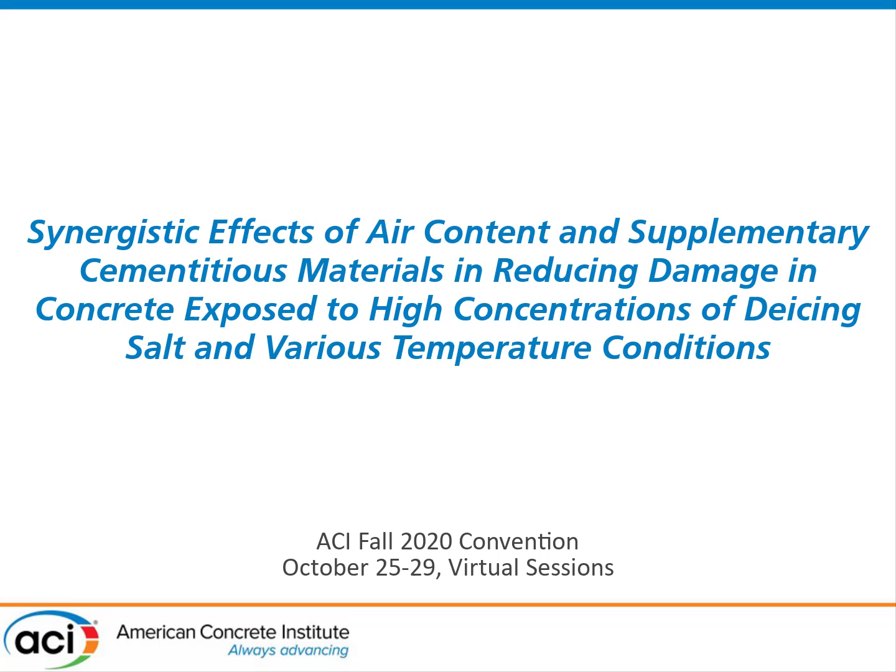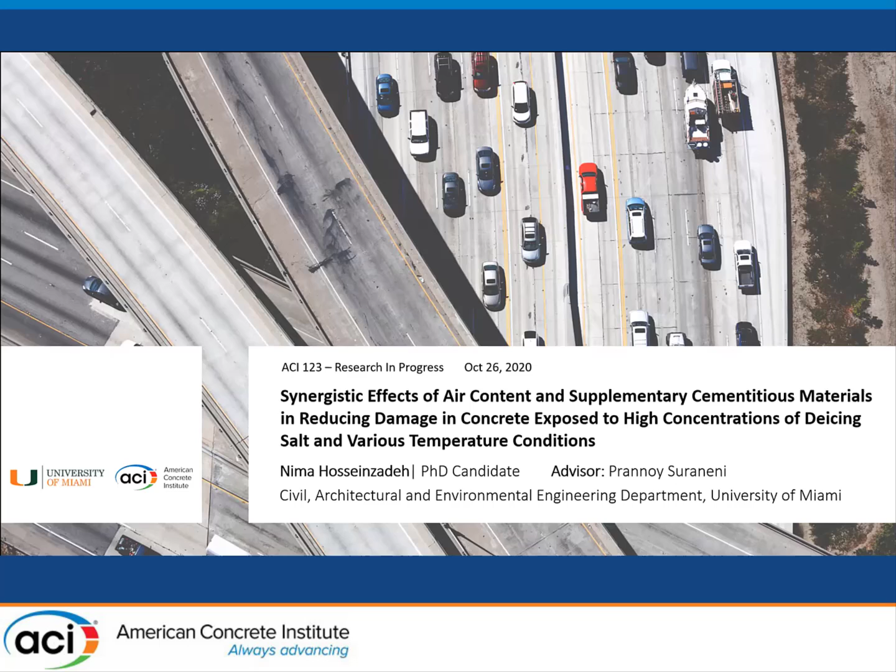My name is Nima Hosseinzadeh, a PhD candidate from Civil, Architectural and Environmental Engineering Department here at University of Miami. I'm working with my advisor, Dr. Prannoy Suraneni. Today I'm honored to present one of the chapters of my PhD thesis, which is on synergistic effects of air content and supplementary cementitious materials in reducing the damage in concrete exposed to high concentrations of de-icing salt and various temperature conditions.

We are going to start with the motivation that triggered us to start working on this project, then move to our objectives and methodology. We're going to get to some results while the research is still ongoing, get some interim conclusions, and then mention the next steps regarding this project.

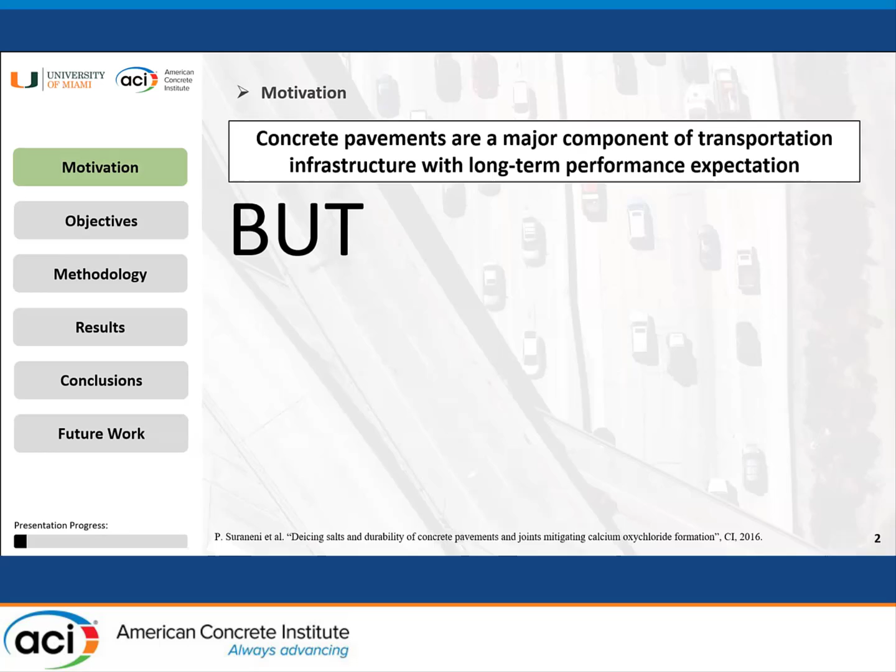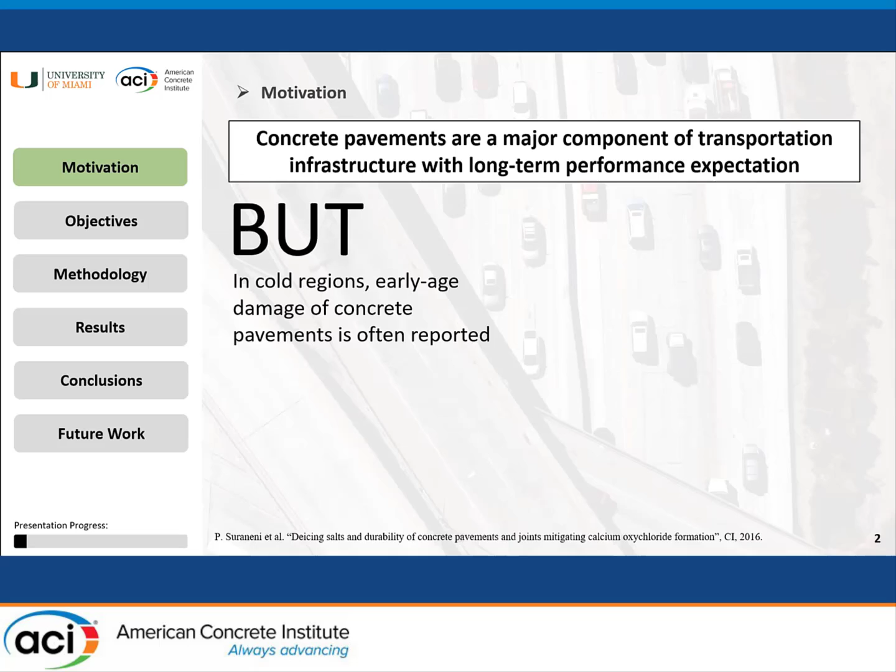Concrete pavements are a major component of our transportation infrastructure, usually designed and expected to have a long-term performance, like 50 years or so. But in cold regions of the United States, cities like New York or Chicago, early age damage of concrete pavements have often been reported. This usually happens within the first 10 or 15 years of the lifespan of the structure, even though they are designed to last for a longer period of time, like 50 years. So what is causing this damage in our concrete pavements?

First, they attribute this damage to the freeze-thaw cycle. As most of us know, we have daily temperature variations. Over the nighttime, the temperature drops below the freezing temperature of water, and over the daytime it increases. This happens over time, and we have water in our concrete. When the water in the concrete freezes, it expands, and this expansion causes internal pressure from the inside of our concrete matrix, which can lead to cracks and deterioration of the concrete structure.

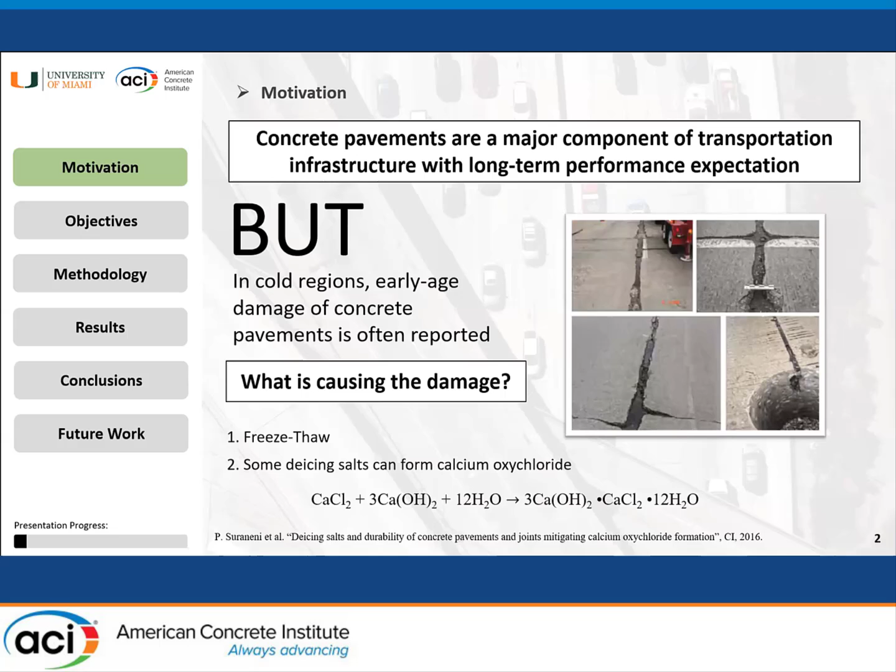In addition to that, we use de-icing salts, which can form calcium oxychloride while interacting with calcium hydroxide in the hydrated concrete. Calcium oxychloride is an expansive chemical, which also leads to internal pressure, which can lead to cracks and deterioration of our concrete pavement.

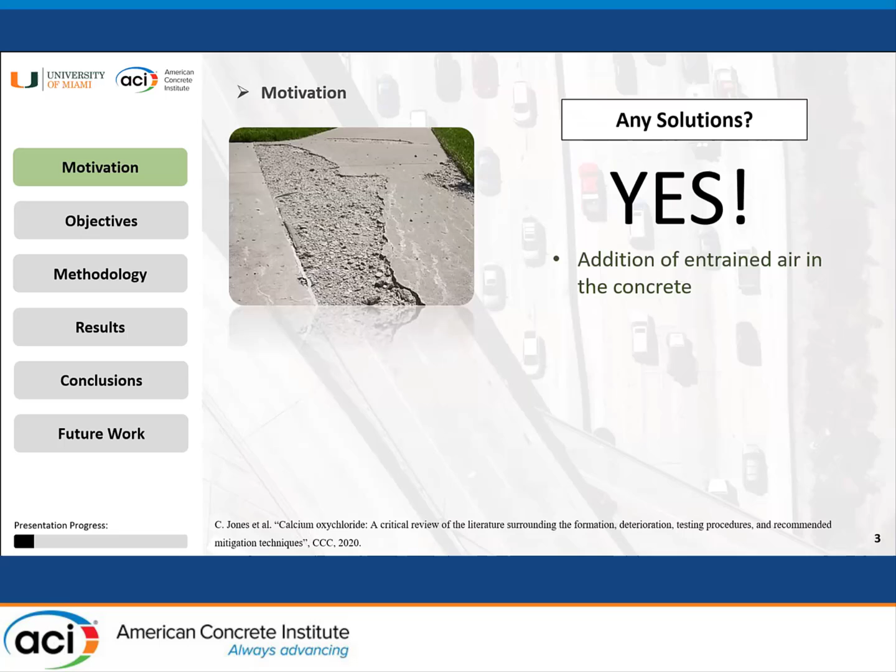But are there any solutions to prevent this damage? Yes, there are. First, we can have entrained air in our concrete, using air entraining agents and admixtures to induce this entrained air. This air provides voids and stress relief spaces in case those expansions happen. In addition, we can replace a portion of our Portland cement in the mix with supplementary cementitious materials like fly ash or slag.

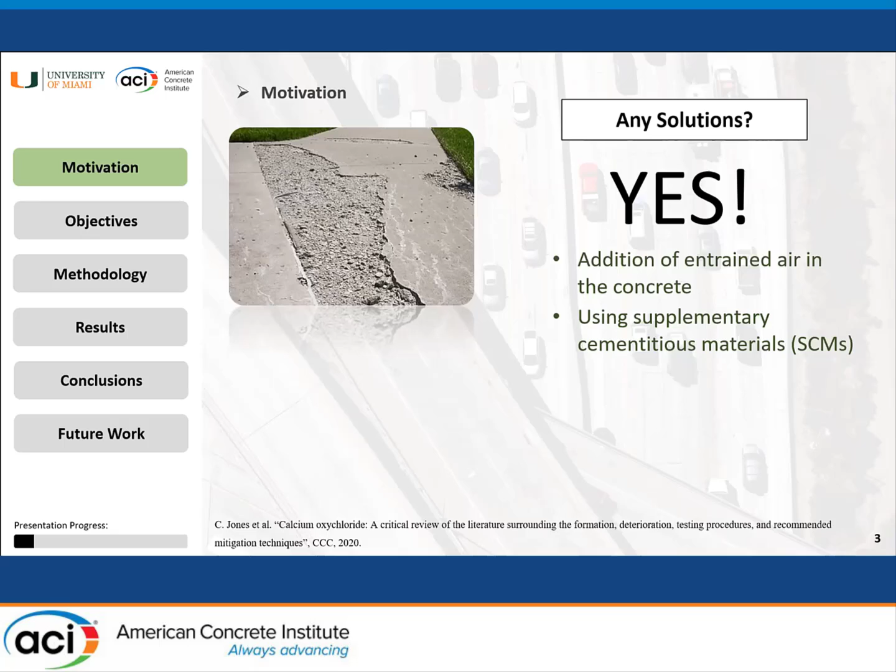How is this going to help? The theory is that by replacing a portion of the Portland cement, we reduce the amount of calcium hydroxide formation, which results in less calcium oxychloride formation. This helps prevent the formation of that expansive byproduct.

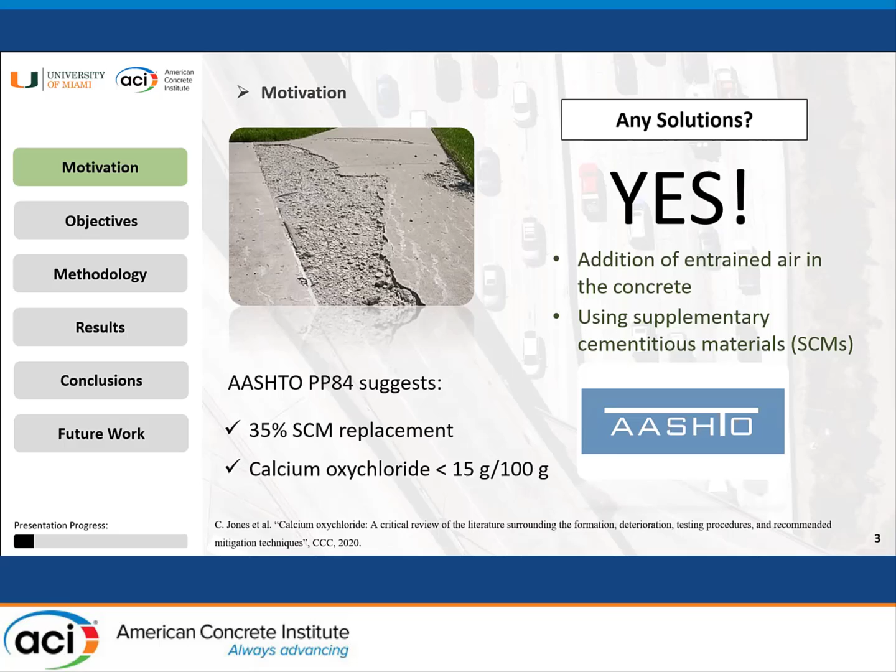AASHTO PP84 suggests that you can replace 35% of your Portland cement with SCMs to reduce this type of phenomenon. In addition, you can control your calcium oxychloride to less than 15 grams per 100 grams of your cement paste. But what are the missing pieces in this criteria that we had?

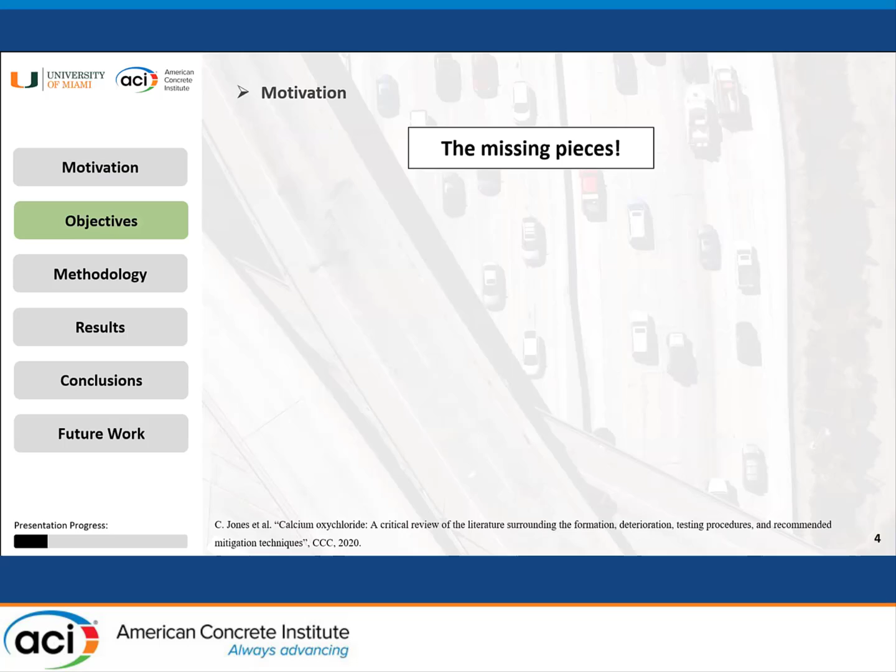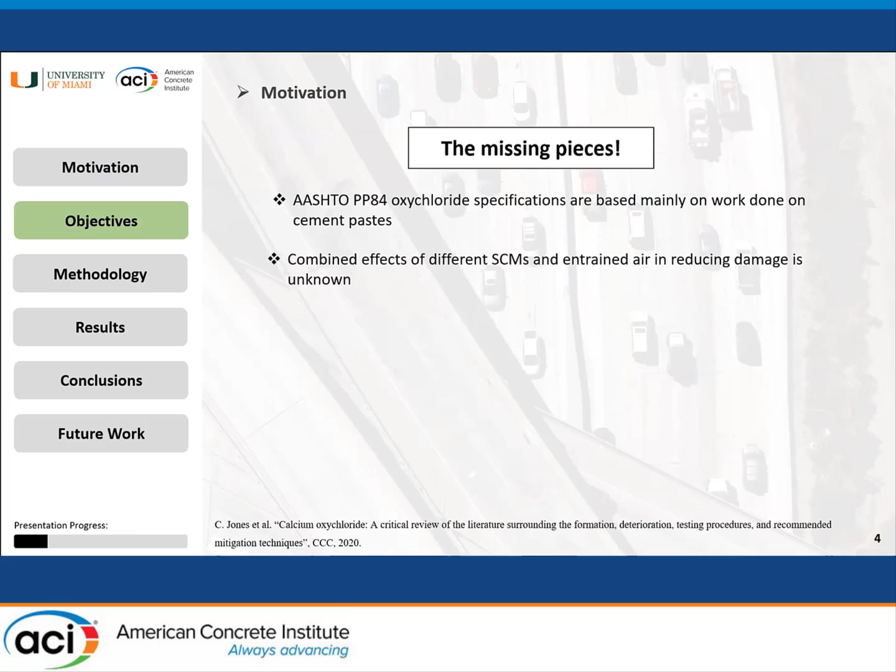First, the AASHTO PP84 oxychloride specifications are mostly based on work done on cement pastes. In addition, the combined effects of different SCM types and entrained air in reducing this type of damage is still unknown.

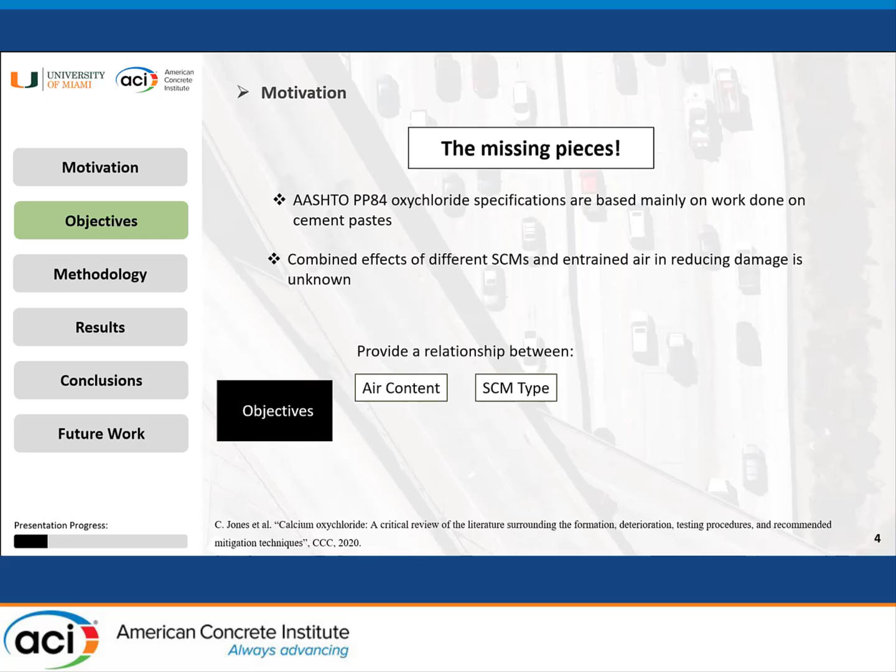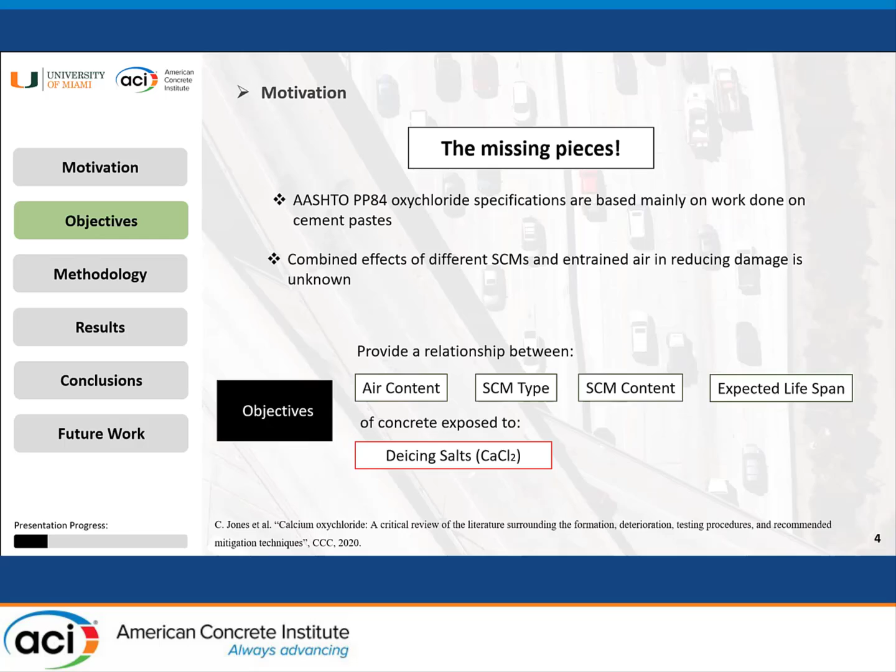That's why our objective in designing this experiment was to provide a relationship between the air content, the SCM type, the SCM content, and the expected lifespan of concrete exposed to de-icing salts—which is calcium chloride in our case—and freeze-thaw cycles.

So let's talk about our methodology and the materials that we used. In this table, you see that we use type 1-2 Portland cement, class F fly ash, and blast furnace slag. The coarse aggregate was oolitic limestone with a nominal maximum size of 25.4 millimeters, and the absorption capacity was measured to be 3.75%.

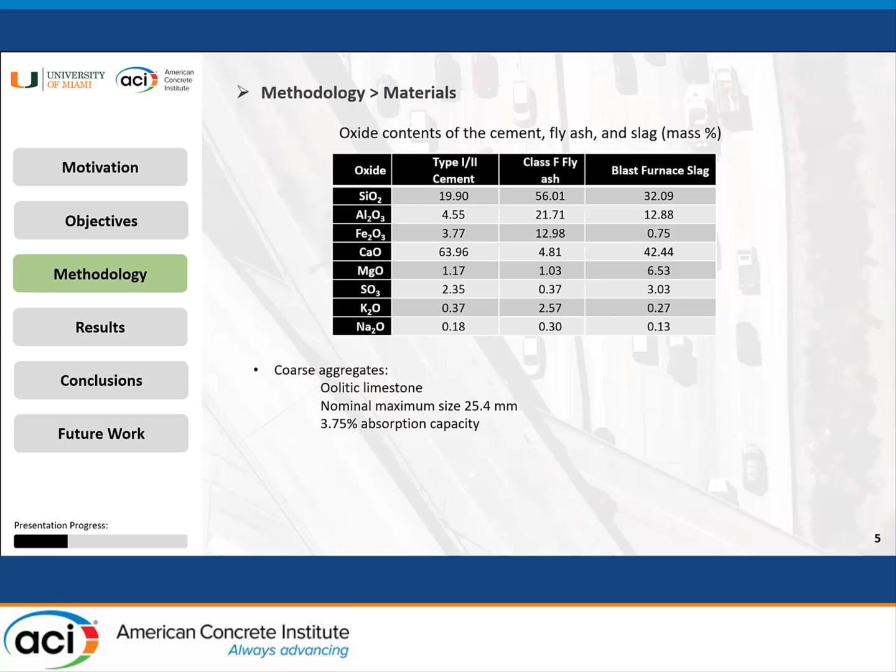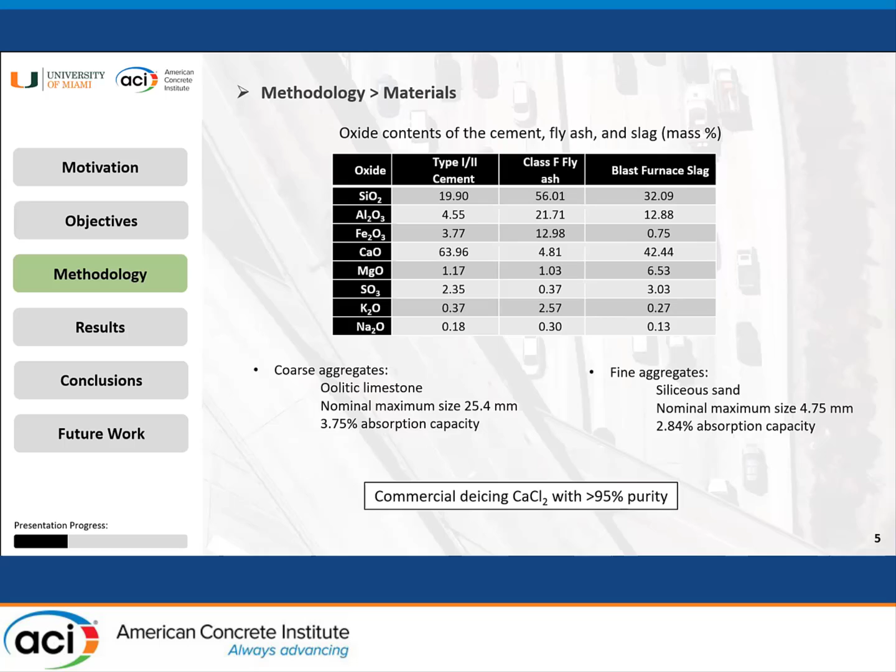The fine aggregate was siliceous sand with nominal maximum size of 4.75 millimeters and absorption capacity of 2.84%. As our de-icing salt, we used commercial de-icing calcium chloride with purity more than 95%.

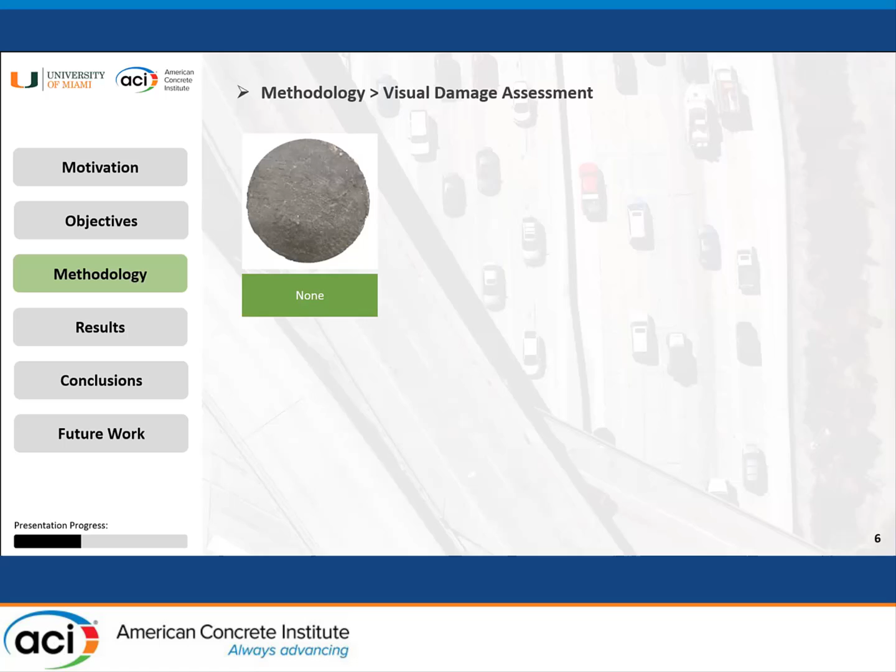In order to classify and track the visual damage expected to happen in our concrete cylinders over time, we created this visual damage classification, starting with none, when no signs of cracks on the ends and sides of our concrete cylinders were seen. Then minor, when short and thin cracks on the ends and, in some cases, around the edges of our concrete cylinder were observed.

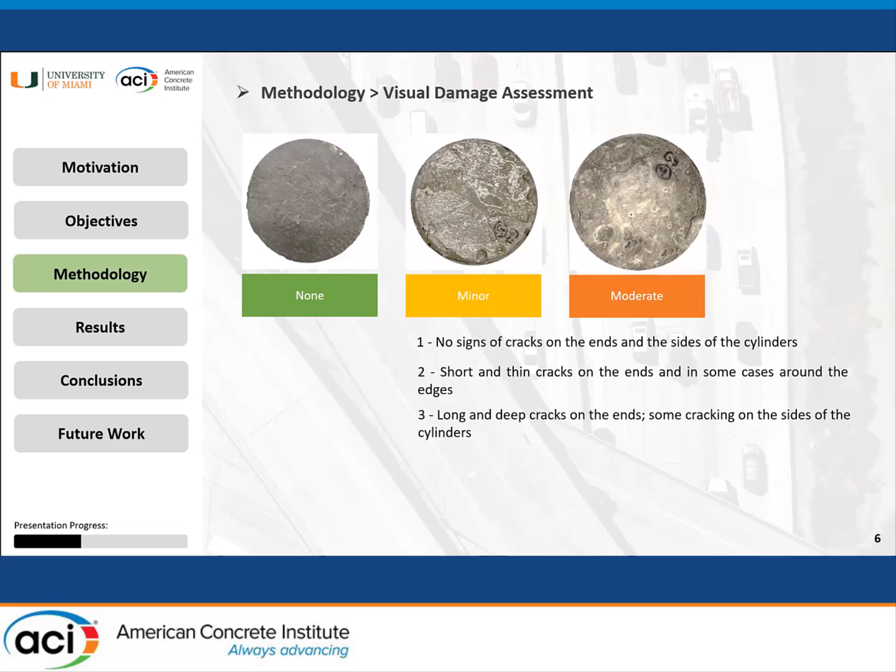Then we have the moderate classification, when long and deep cracks on the ends and some cracking on the sides of the cylinders were observed. Then severe, when large amounts of spalling at the ends of our cylinder and some cracking on the side and middle section of the cylinder is observed.

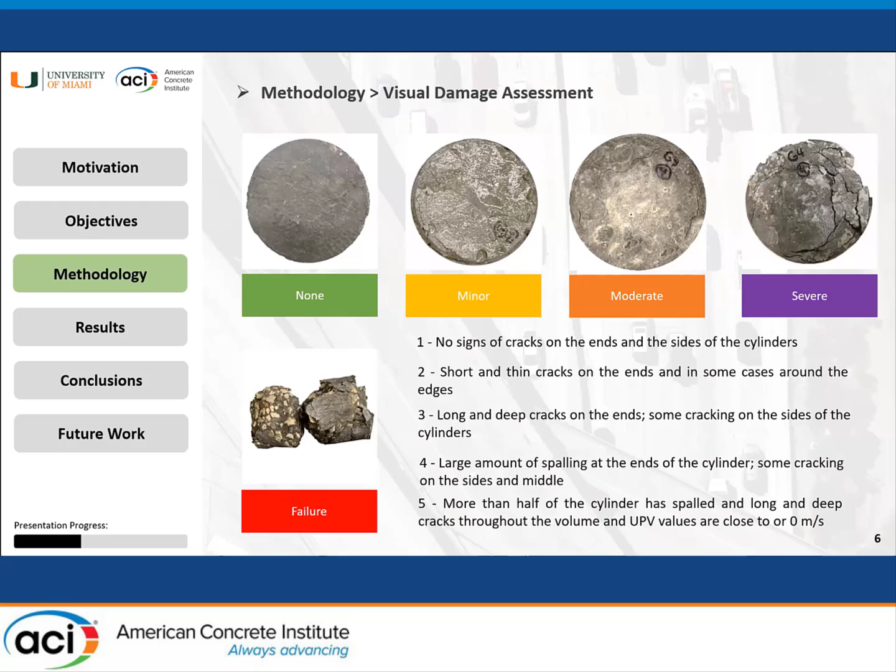And then we have failure, which is when more than half of the cylinder has spalled and long, deep cracks run throughout the volume, and the UPV values, which are going to be measured, were around zero.

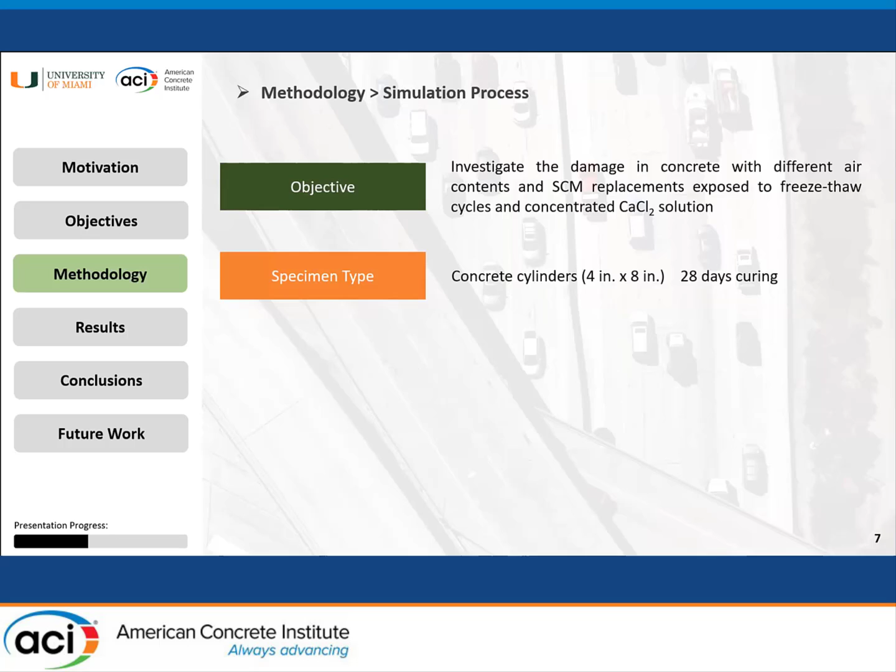As we mentioned, the objective was to investigate the damage in concrete with different air contents and SCM replacements when exposed to freeze-thaw cycles and submerged into concentrated calcium chloride solution. To get to that, our concrete cylinders were cast with dimensions of 4x8 and cured in moisture for 28 days.

The exposure was a freeze-thaw cycle. Each cycle took 48 hours. In the first 24 hours, the samples were submerged into 25% calcium chloride solution inside a freezer, where the temperature was measured to be around minus 10 degrees Celsius. In the next 24 hours, the samples were taken out of the freezer, submerged into the salt solution, and kept in ambient condition, measured at 23 degrees Celsius.

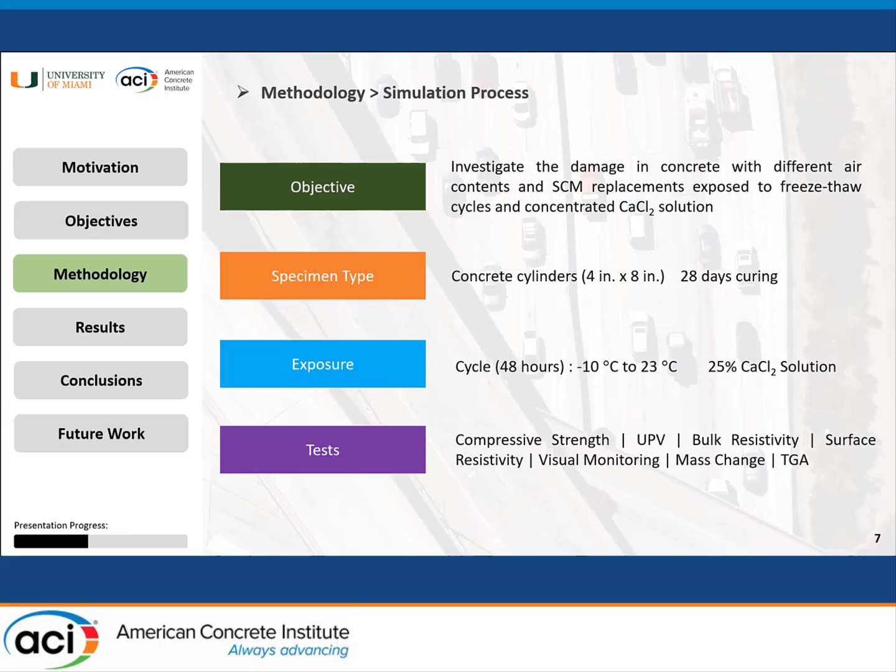The tests we utilized to keep track of these measurements and the damage that was going to happen were compressive strength, UPV, bulk resistivity, surface resistivity, the visual monitoring system we talked about in the previous slide, mass change, and thermogravimetric analysis.

As of today, we've experienced 260 freeze-thaw cycles, equal to 520 days of exposure. Now I'm going to get to the results so we can spend more time discussing them, starting with the compressive strength values versus the air content, which was measured before samples were exposed to these cycles.

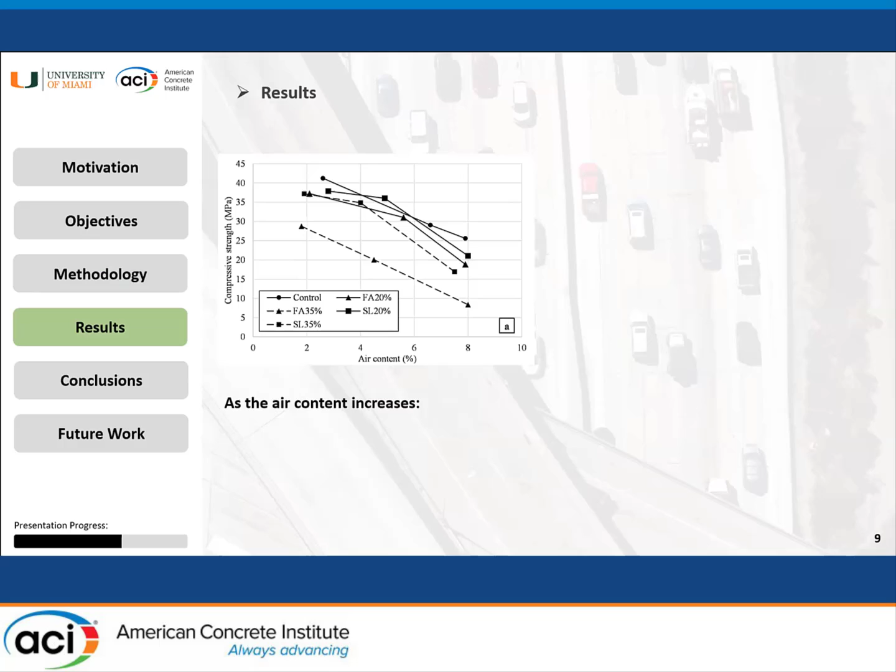As the air content increases from left to right, you see that compressive strength decreases, and the strength drop varies based on the SCM type. With the fly ash, as you can see here, you are experiencing the highest drop.

On the right side, I'm showing the bulk resistivity values versus air content. Again, from left to right, the air content is increasing, and with this increase, the bulk resistivity is generally increasing, with the SCM type and content having a somewhat complicated effect on the bulk resistivity values.

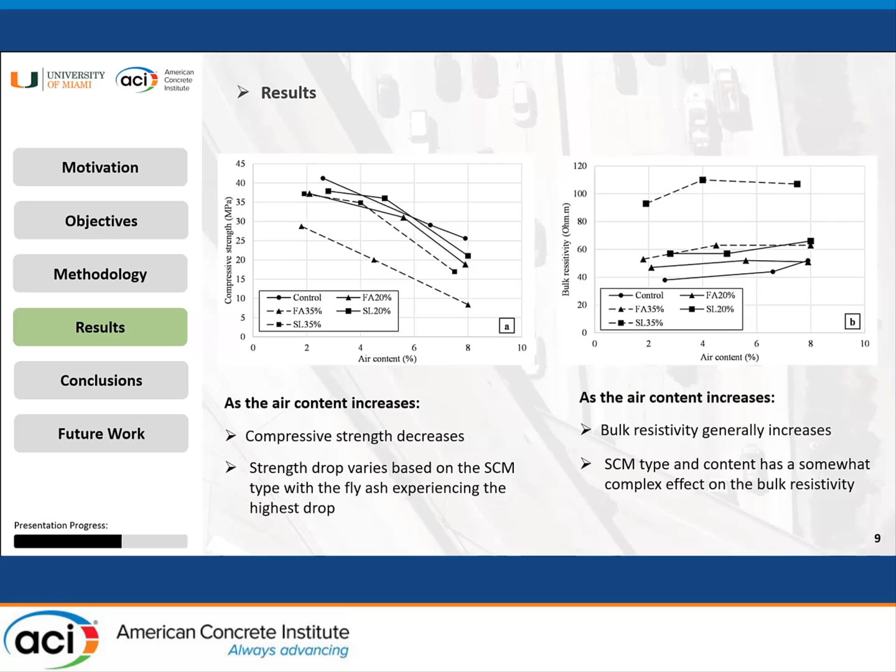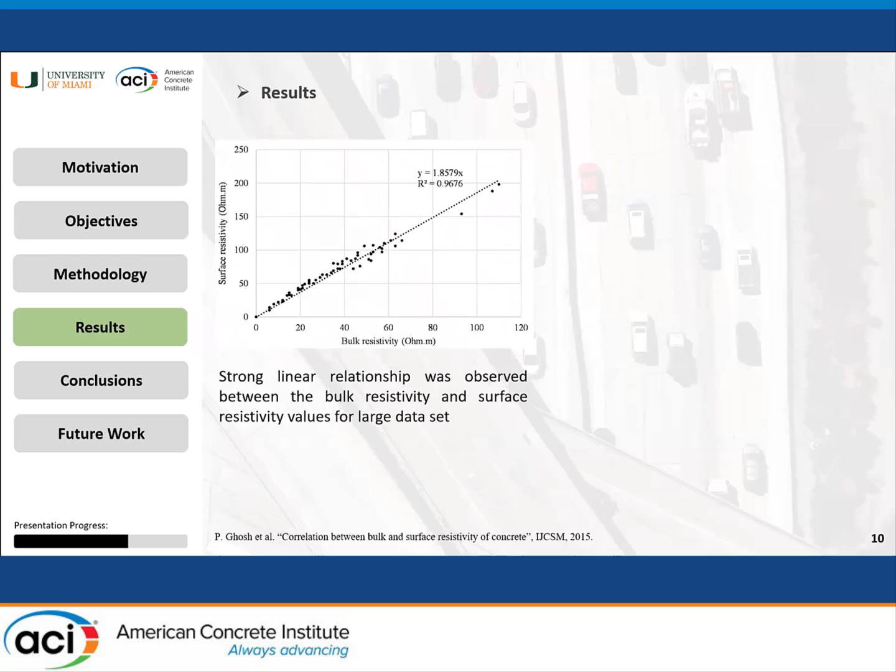In this slide, on the left side, you see the surface resistivity values measured for a large number of samples versus the bulk resistivity, and it's obvious there's a strong linear relationship between these two values. That's why surface resistivity was not measured for the remainder of this study.

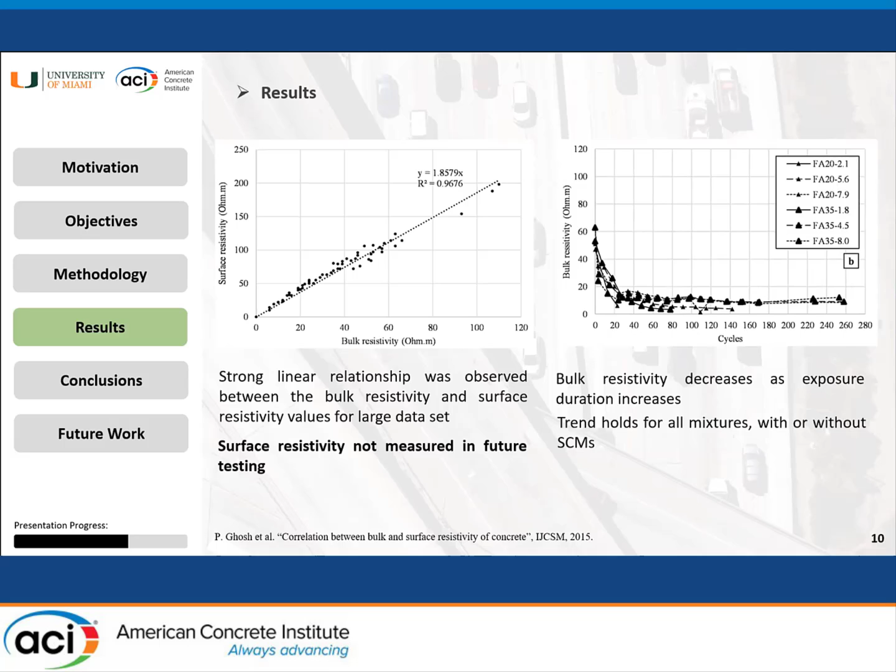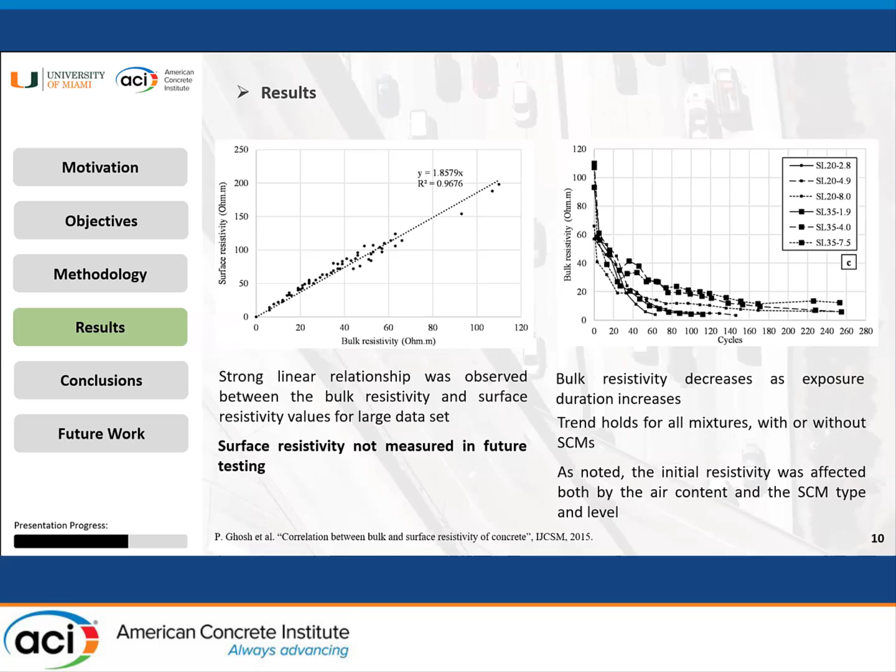The same case holds for the samples containing fly ash with different amounts of air, the trend holds for all of the mixes, whether they have the SCM in them or not. It's the same case with the samples containing slag in them. As noted, the initial resistivity was affected both by the air content as well as the SCM type and their portion in the mix design.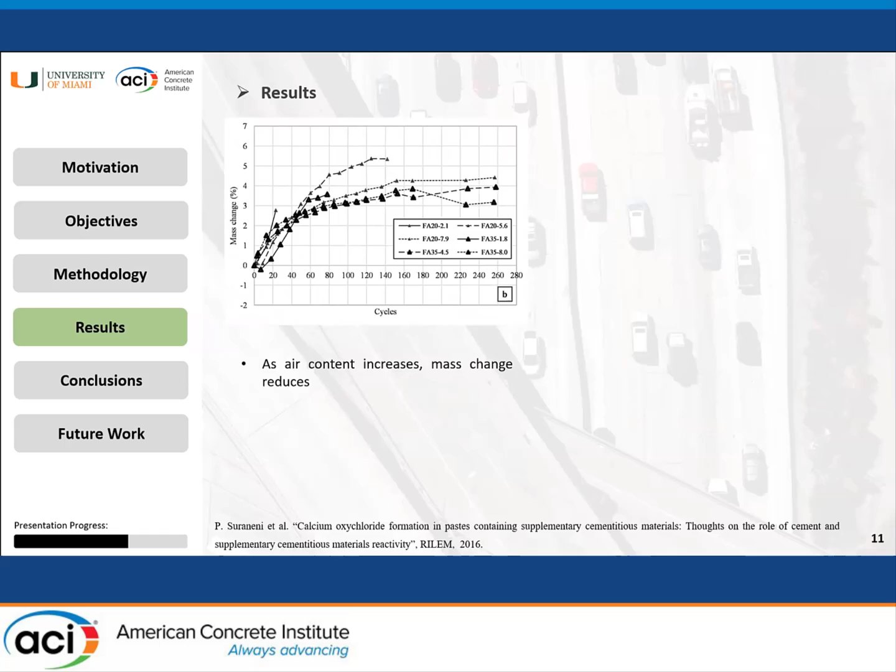It's the same case for the samples containing SCM. Here we have the fly ash, so the mixtures with higher SCM are experiencing less change in mass. And it's the same case for slag. We have the air content increasing, and it gets just more complicated when we have both air and the SCMs presented in our mix design.

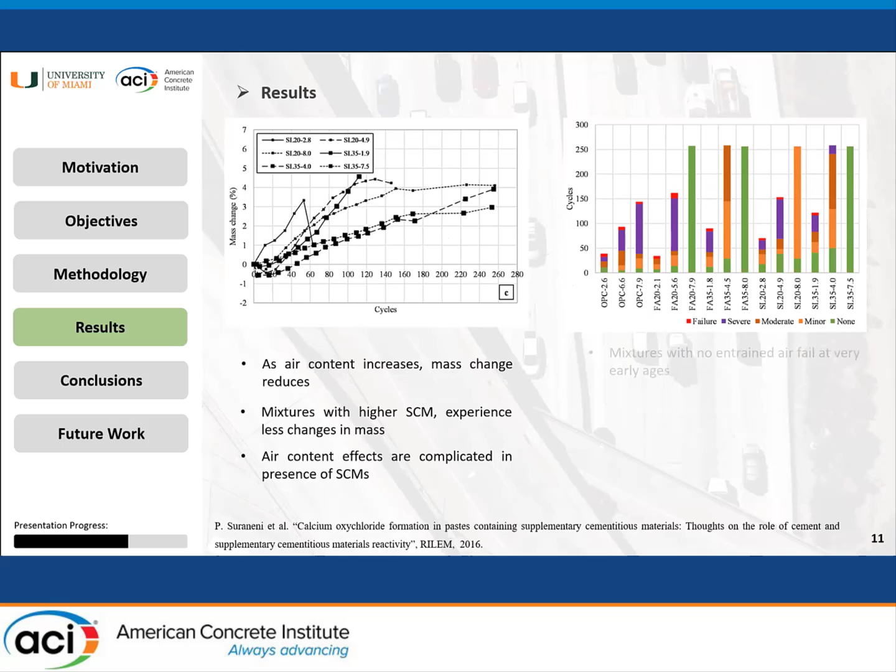As you can see, we have our visual assessment classification. The ones having the red color at the tip of the bars mean that they have already failed. The ones with the green color have not experienced any sign of damage. So the mixtures with no entrained air are failing at very early ages. As you can see, the ones with no entrained air here, and here, and this one here, they have already failed at very early stages.

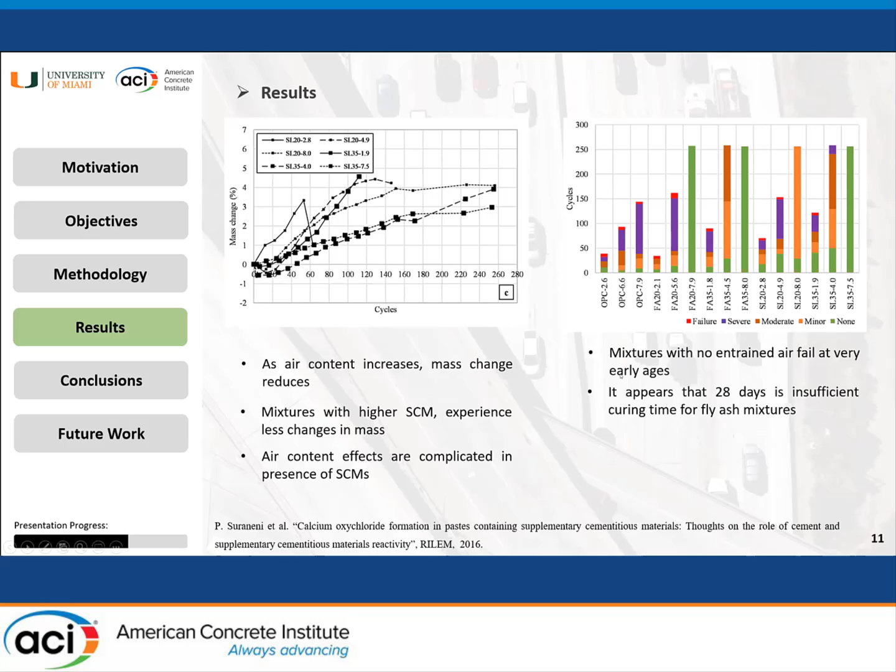It appears that 28 days of curing is insufficient for the ones having fly ash in them. Both air and SCMs are significantly increasing the time to failure, as we can see here from left to right. SCM type and replacement levels are affecting the time to failure significantly.

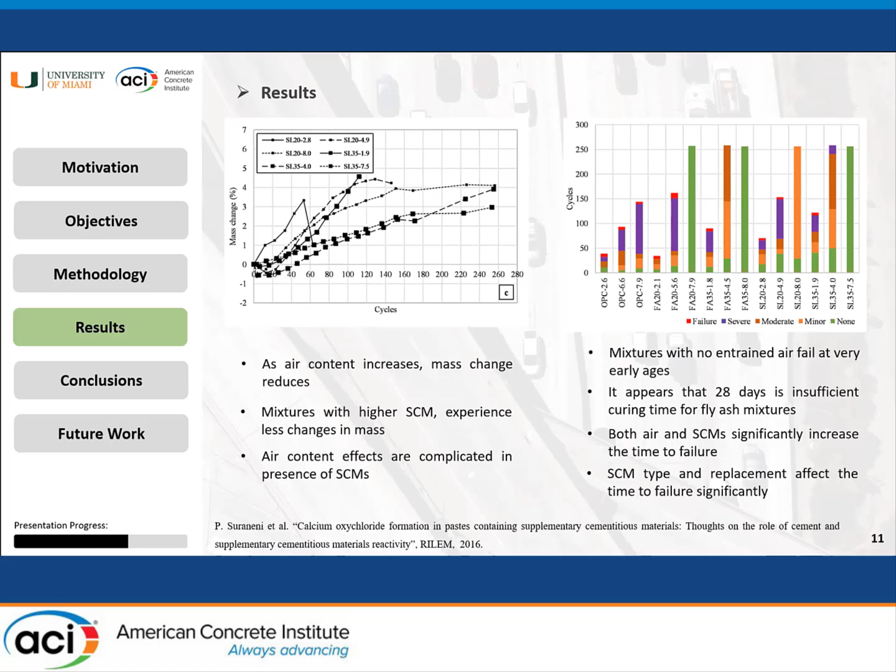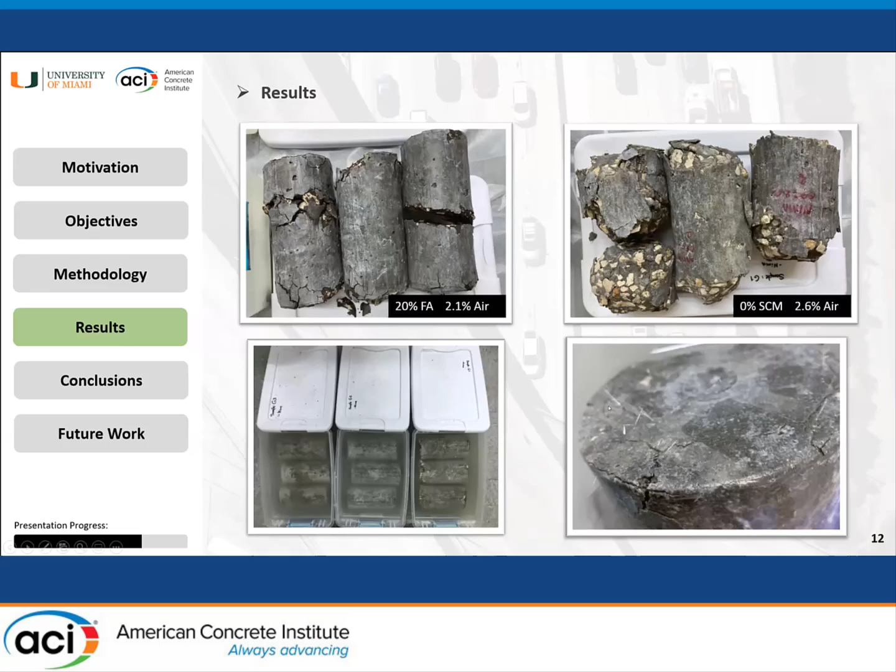So let's get to some interim conclusions based on the results that we have so far, as we're still continuing this experiment. The damage evolution is generally slow, and some mixtures show little to no damage after being exposed to several months of testing.

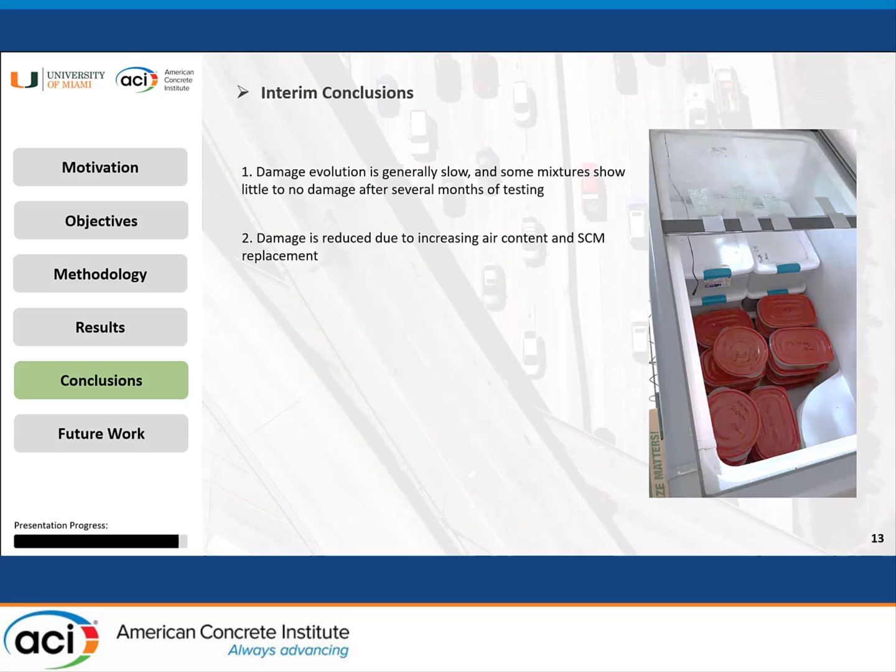The damage is reduced due to increasing air content as well as SCM replacement. There is an interplay for sure between air content and SCM replacement, and that's why the best performance is seen in the mixtures with high air contents and SCM replacement levels. In addition, visual analysis, bulk resistivity, and surface resistivity are all good indicators of damage progression, although bulk resistivity measurements can be tricky due to the dry condition of our samples.

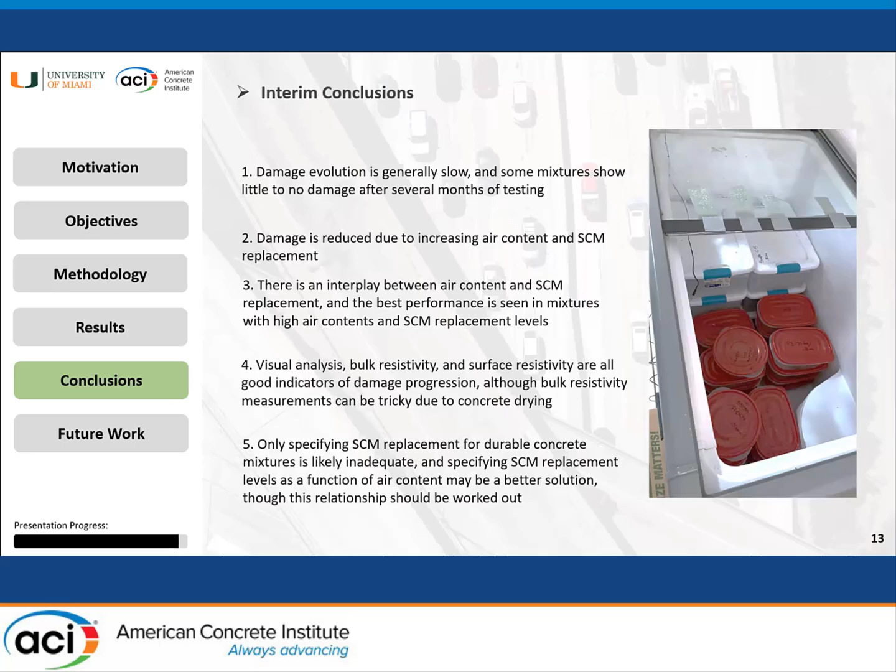Finally, only specifying SCM replacement for durable concrete mixtures is likely to not be enough. It's really critical to specify the SCM replacement levels as a function of air content to have a better solution. Through this relationship, we are going to have a more durable concrete mix in such severe conditions.

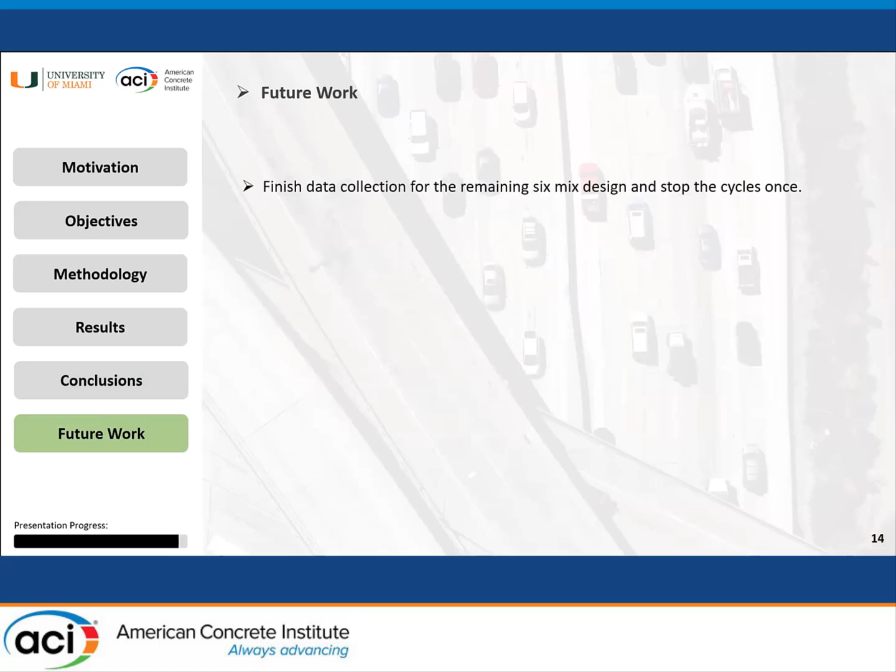So what are the next steps? First of all, this is an ongoing research, and we need to finish the data collection for this phase, which is still ongoing for 6 mix designs, and we need to stop the cycles. Since this research was part of my thesis, which is made out of 3 other phases, this preliminary data is going to help us decide where to stop and how to treat the remaining phases.

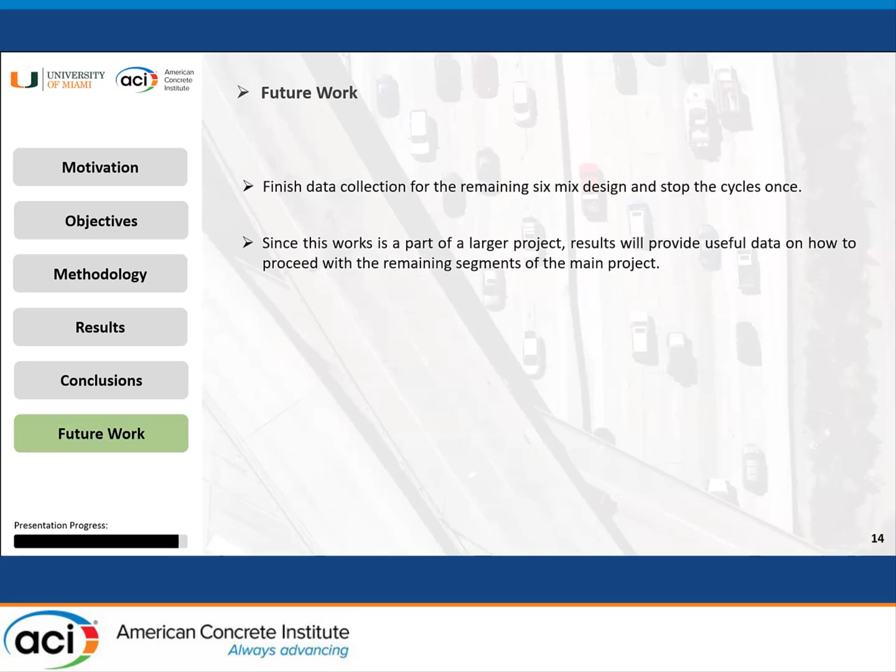With completion of this study, both the overall and specific objectives of the study will be achieved. Overall, this work will lead to significant savings in cost, which is mostly in repairs, time and labor, and of course, use of natural resources.